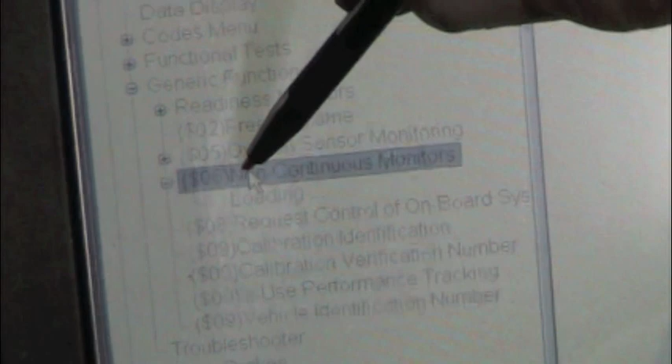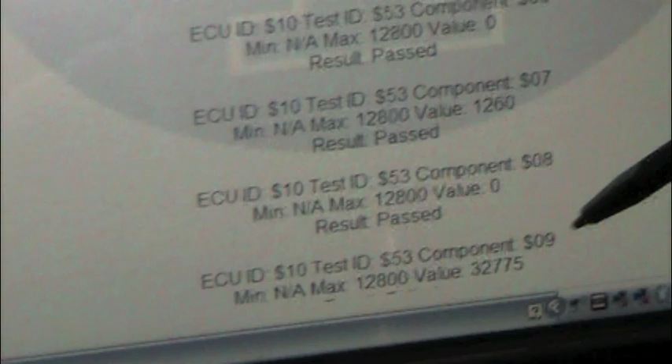Once the mode 6 comes up, you'll see all the different test IDs. For the misfire counters in a Ford, you have to go to generic 06 and test ID 53. Now once at 53, it'll bring up all the cylinders. Now if you look over here, there's cylinder 1, 2, 3, 4, 5, 6, 7, and as we scroll down you can see 8. Now it also shows 9 and 10, which we ignore because this is not a 10 cylinder.

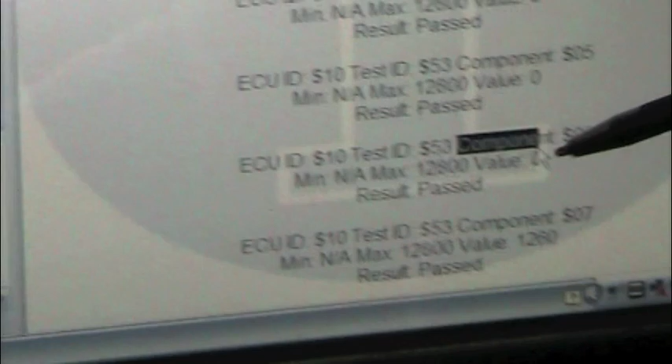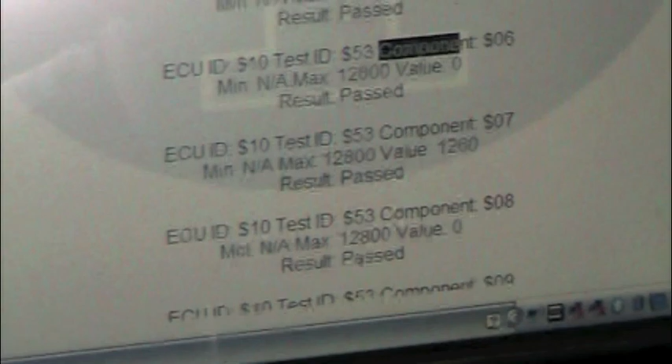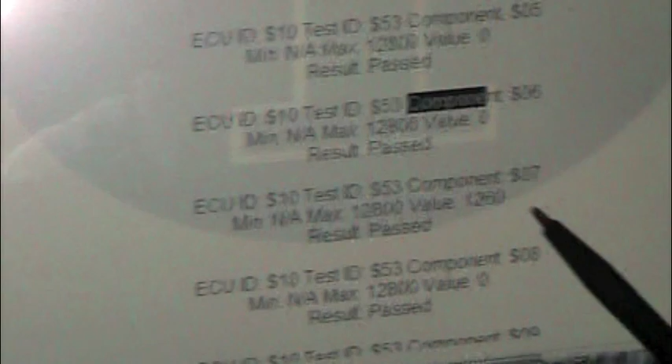So we're going to go back up here and you'll notice 1 through 6, the value is 0, no misfires. But on number 7 there's 1260. Number 8 there's 0 again. So the computer's picking up some of these misfires. Now my personal feeling is there's a whole lot more misfires than 1260. But again, my experience is Ford usually won't turn on the check engine light till there's about 14,000 misfires or more. But anyway, so we're going to go look at plug number 7, see what the problem is there.

Now the good thing about the Verus, the way it's set up too, that I like, is we can go ahead and leave the scanner plugged in, but I want to go around to the engine compartment. I got a long enough cord, I can leave the scanner plugged in, and we can go up here and start looking at the engine.

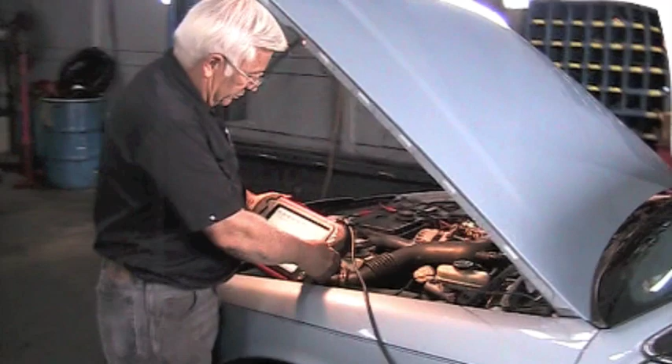Now what I want to do in this case, I'm suspecting that it may be the coil. The reason is, I got no reason to believe it's not, or that it is, but coils are pretty commonly a problem on it. We took the spark plug out, and it actually looked pretty good. As I said, we replaced them not long ago, but anytime I take a spark plug out, I'm going to put a new spark plug back in it. So we've got a new spark plug in it. Next thing to check is the coil. But how do we check the coil?

There's a lot of guys that have just a whole box full of known good parts. When they got a misfire, they might just change the coil. If that fixed it, they say, well, you had a bad coil. And they did, and you actually fixed it, but you don't know why. Probably one of the most common ways is to take the suspect coil out, swap it with another one, look at your scanner and see if the misfires followed the bad coil. If they did, you'll probably change the coil and you'll fix it, but you really won't know why, and you won't be able to verify it.

Now if you have a lab scope, using the scanner and the lab scope, we can actually show you how to identify the problem, fix the problem, and have total confidence when you talk to your customer about what was happening and what you had to do to fix it.

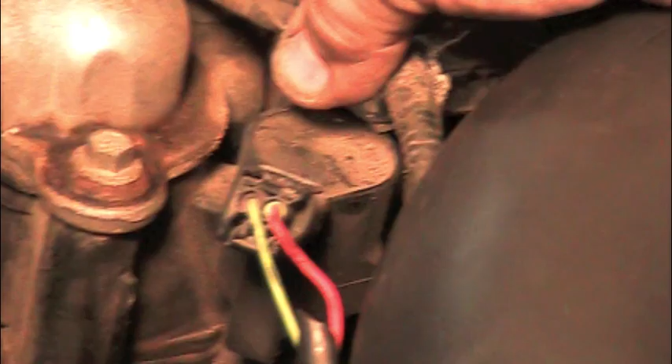Now this engine has the coil on plug style. You can see the coils right there. Now get out your wiring diagram and you'll see that all the coils have a red wire. That's the power wire. They'll have a different colored wire on the ground side because the computer supplies the ground. So we're going to look at the ground wire, or the colored wire, on number 7.

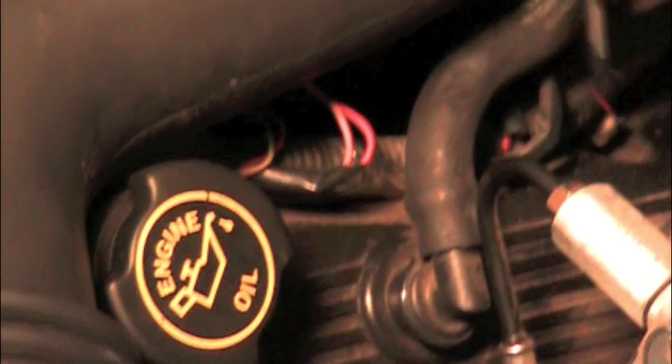Now as I said, we took the plug out, put a new plug in, put the coil back in. But we're going to look at this coil. We're going to use current ramping, so we're going to use the negative side. Now you have to use a low amp current probe. Switch it up to the sine wave side, the 20 amp. And we're going to place it around the negative wire.

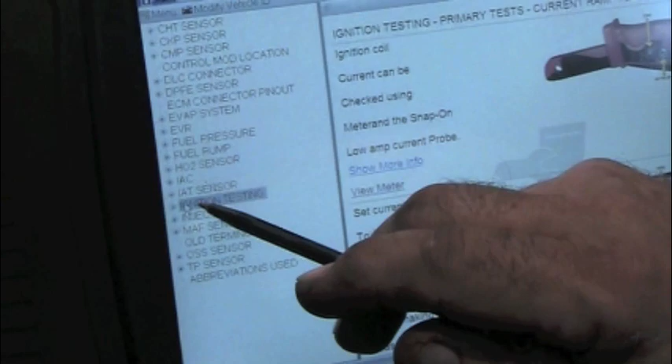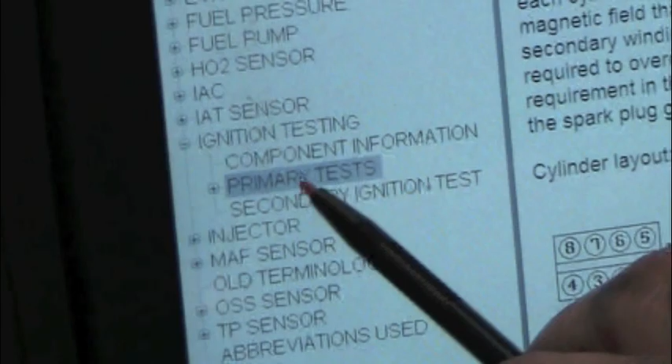Under component testing, I'm going to scroll down and go down to ignition testing. There you can get component information here, tells you about it, tells you your firing order and everything. We're going to go down to primary tests. And I'm going to go down to current ramping. We could do key on, engine cranking, resistance, signature, but I'm going to do current ramping.

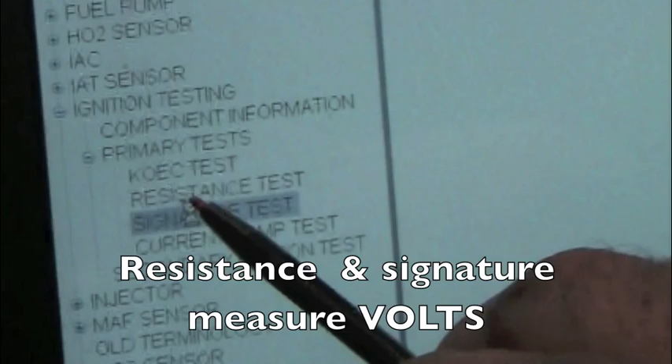Now just here's a point, if you're going to do resistance or signature, you're going to be using a voltmeter attachment, not a low amp current probe. But on coil testing you want to use a current ramp, so you have to use the current probe. It'll tell you right here exactly how to set it up. You can scroll down here for more information. This is the type of signal we're going to be looking for right in here. Now I'm going to view the meter.

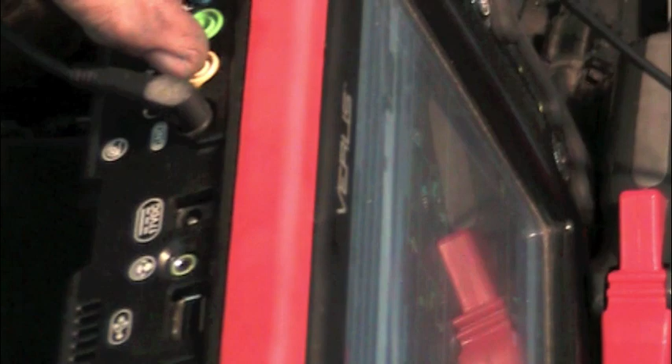There's our meter. Now to check the coil, we're going to use a low amp current probe. We need to plug it into the back. The ground always goes into the ground connection or the common. Now this is a 4-channel scope. The channels are color coded. We're going to use the yellow channel.

Since we're plugged into the yellow channel, we're going to use the yellow pattern on the front. Now you can see our pattern. We got yellow, green, blue, and red. That's for the colors that were back here. We're plugged into yellow. We're going to look at the yellow line. We're going to hook our current probe around the negative wire on the coil and start the car.

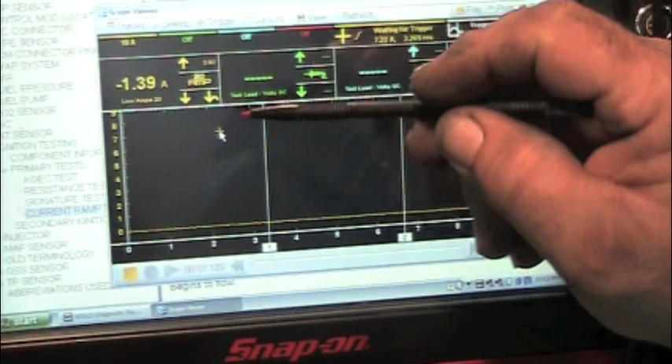Now you don't see anything. Well, don't get confused. You've got to learn your scope. You can see something's going on there, but our trigger is way up here. So let's slide our trigger down. Now we'll slide this thing up. You have to get it to where you can see it. You got your sweep. Now you can see there's something there, but you can't tell what it is.

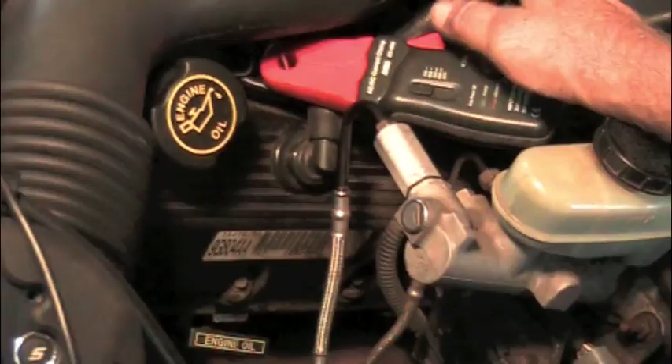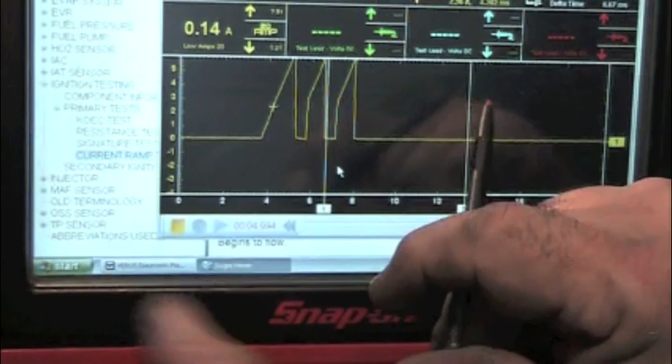This is electrical current, so it does have a polarity to it. If it's that way, then unhook it, turn it around, and put it back on the other way. And now you can see on our scope we've got a pattern and it's going up. So you have to have the correct polarity. If you hook up your scope and nothing's right, nothing's making sense, start checking your settings. Now, I can't see the peaks, so I'm going to go over here and drag this down a little bit where I can see the peaks.

Now, as you look at the coil, we're triggering right here. The coil is off, 0 amps, comes over and the coil turns on and goes up and turns off. Now, actually, I want to spread that out. So I'm going to go up to my sweep again. Let's go down to 10 milliseconds. Go to my sweep again and go down to 5 milliseconds. And now it spreads it way out and you can see it. Now, is this a good pattern or a bad pattern?

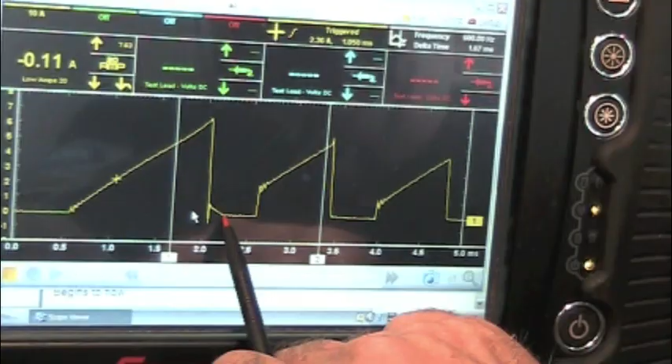When you're looking at the coil turns on, energizes, turns off, and then these are repetitive patterns. They're normal in this type of ignition system. But you can see the baseline is not staying stable after the fire. Now what do I mean by that? Let's switch and go to a good coil and compare it.

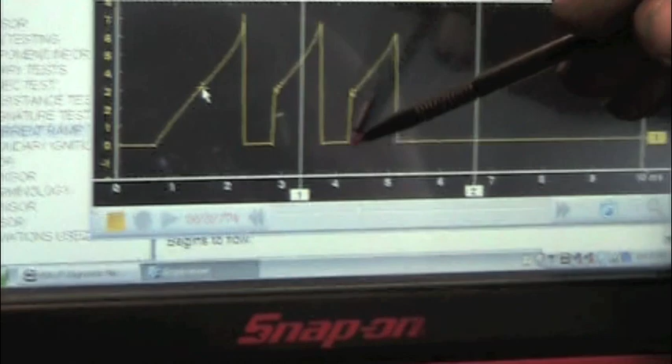So we're going to come off of the coil we suspect and go to a known good coil. We're going to leave it around there. And now we're looking at this coil, the same thing. Okay, so as you see, the coil turns on, energizes, powers up, and turns off. But the baseline stays level the whole time. Now again, this is on the good coil.

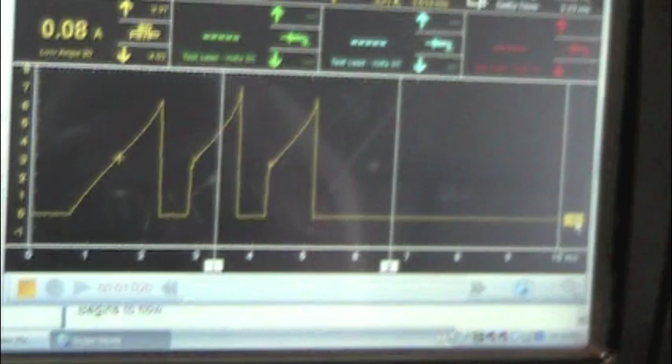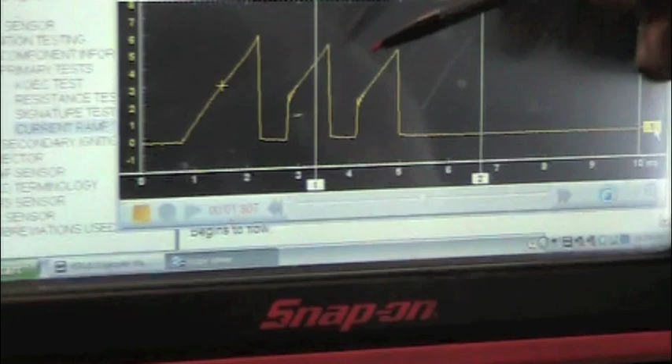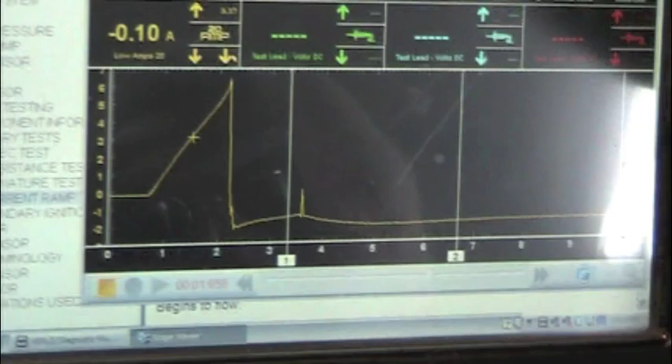Now let's go back to the bad coil. Let's show this. We're going to go back to the bad coil. Now if you look at this, the baseline after the coil turns off drops out sometimes. Now I'm going to emphasize this a little bit more by brake torquing it or power braking it. So let me raise this up here a little bit. Now watch this signal when I brake torque it.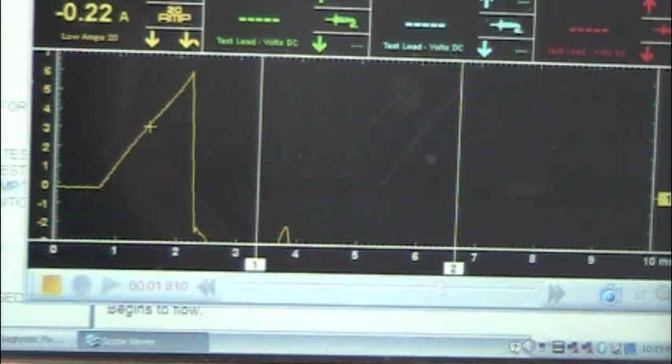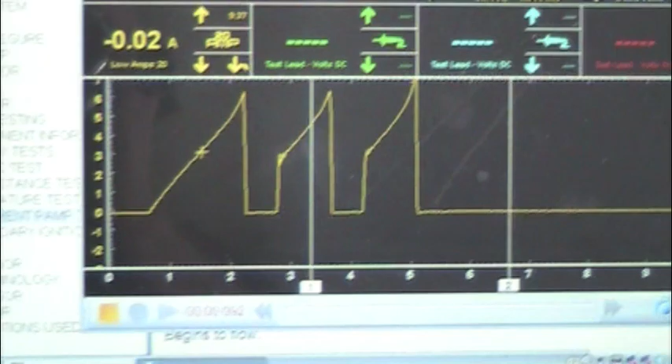Yeah, it's dropping all the way down in negatives. Okay, let's compare that now. Let's go back to our good coil. And I'm going to brake torque this one. Yeah. Yeah, it ain't dropping. It's flatlined after the fire.

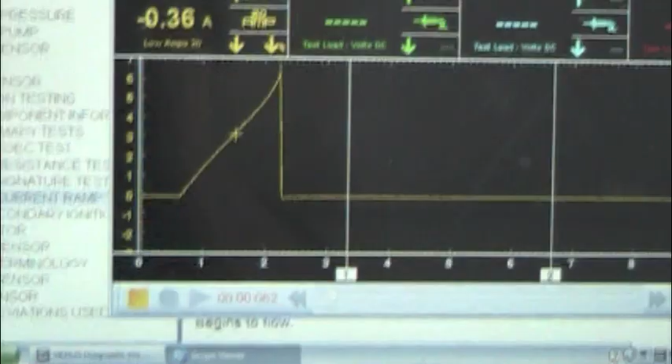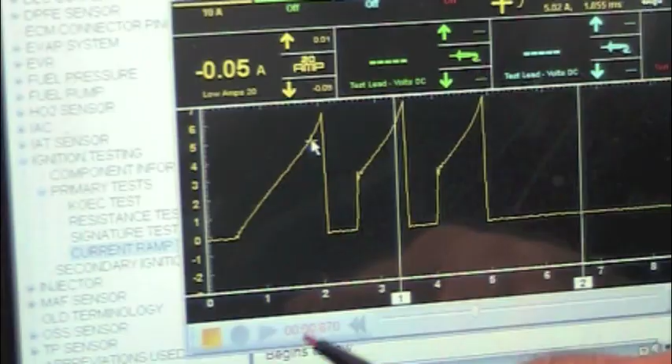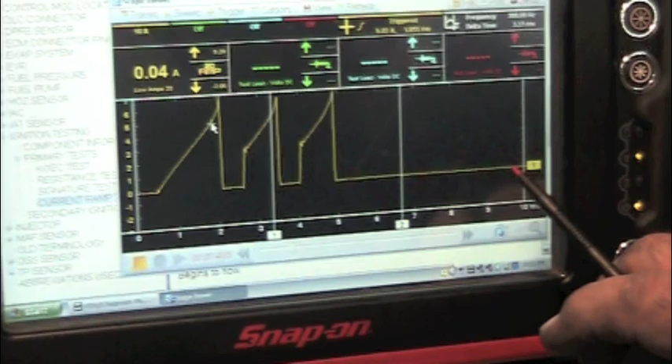So you can see now we're on a good coil. Our coil is energizing up. Now if you don't want this to jump around a little bit, you can raise the trigger up to a little bit of higher point on the peak and it'll trigger off this higher part. It'll keep it from jumping down. But the baseline stayed level on the good coil, and on the bad coil it had an unstable baseline. Too much resistance in that coil.

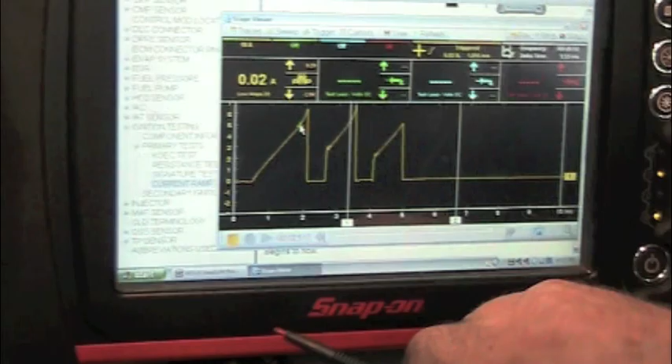So what we're going to do now is change the coil number 7, and then look at the scope. Now, fortunately, these coils are pretty easy to change. We just loosen the strap, take these out, take this off. You can see the coil right there. We unconnect it. There's a screw holding it down. We've actually even already taken that off. Got a new coil.

Put that in there real good and snug. Plug it back in. Put our tubes back in. Tighten down our breather box. Breather tube.

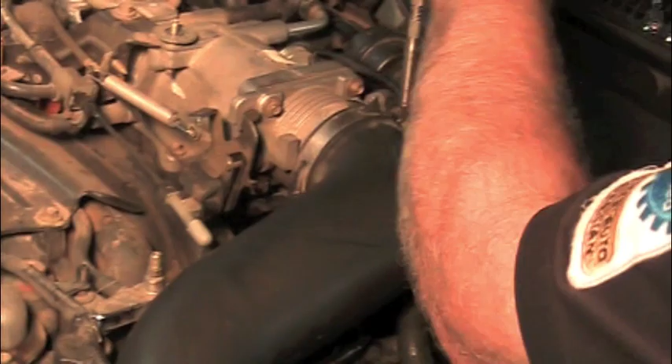Now, we're going to take our current probe. Now if you have a current probe like mine that has a fail-safe in it, it'll turn off to be a battery saver. So sometimes you turn it on, you got no signal. Always turn it off and then back on until your light lights up. I've many times wondered where'd my signal go, and I come back and find out the current probe is turned off. Now we start it.

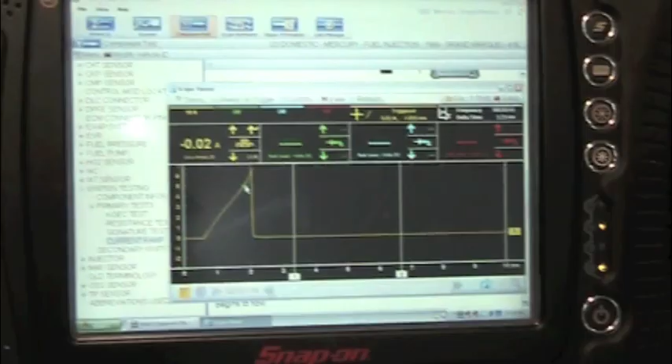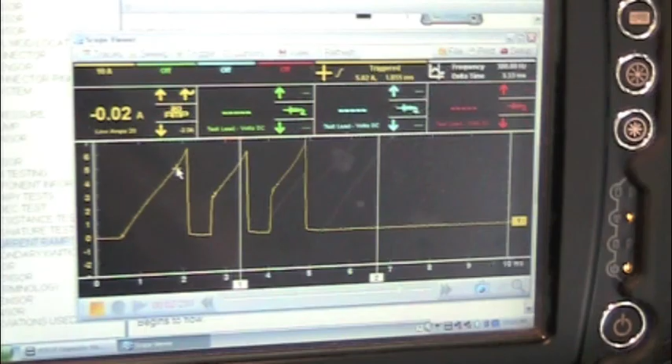We got our coil signal on there. Okay. Now we're on the new replacement coil. I'm going to go brake torque this. Okay, now you can see we got the new coil, we got a good stable baseline, and our misfire is gone. I know on video you can't feel that miss, but the misfire is gone.

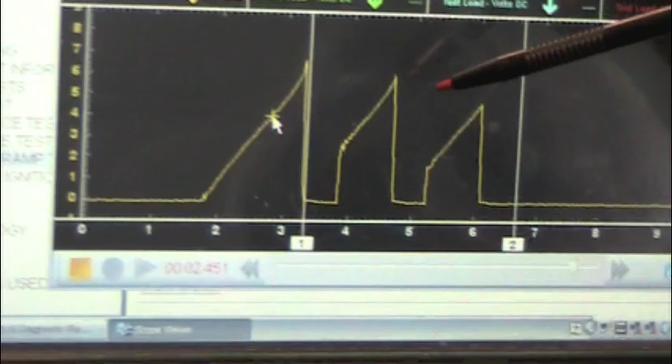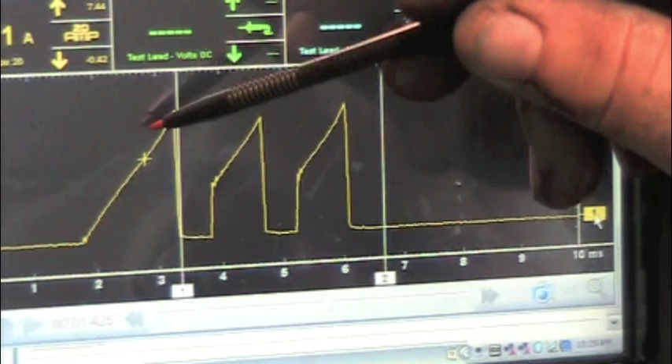So get familiar with your scope, know how everything works. You can actually move it up higher, down. Sometimes if you hook everything up and you don't see anything, maybe your trigger's not right. Now my scope, I can actually move my trigger with my stylus. I can move it up here. The trigger's right at the very tip. If I move it up even higher, you can't see anything because the trigger's too high.

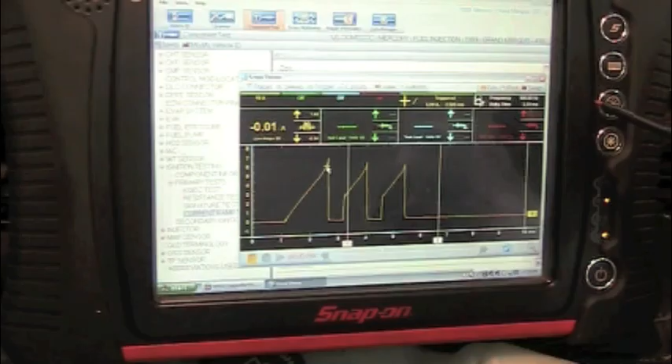The trigger is the point at which the scope is going to start recording. The trigger's so high, there's nothing going up that high. If I bring the trigger down, it'll pick up the signal and start recording. Now some scopes, the ones I've had in the past, they'll be like a thumb wheel or an arrow over here. You can move the trigger up and down that way. But somehow you'll be able to control your trigger. So get familiar with your scope and you'll be able to diagnose better.